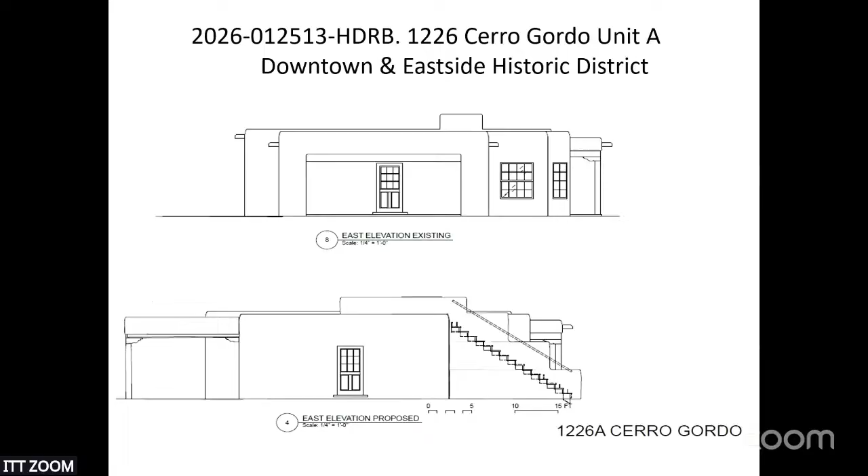It looks like maybe the existing condition violates that as well. Is that right, or am I looking at the drawings wrong? The west and the east? Yes. So I do believe that they met the 3-foot rule. I don't have dimensions on this particular window. I can say for the west for sure, it really does seem that it's 3 feet.

But I could not speak to the east, though I can allow the applicant to answer that. I do know that I don't believe any of the window dimensions are really going to change, just the window type. It appears that it's really close to the corner, but maybe I'm just seeing that differently. Thank you, and that may be existing on the new one.

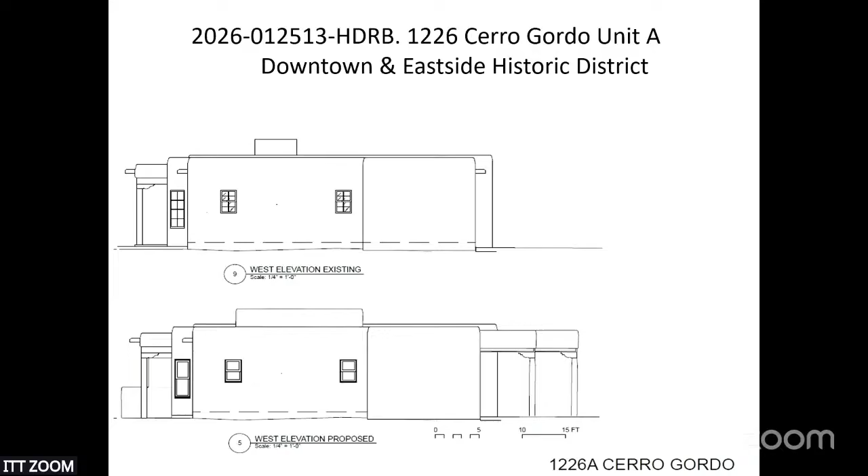Madam Chair, first, I'm going to miss Gary. Sorry, it caught me off guard. In reference to your question about how close we are to the...

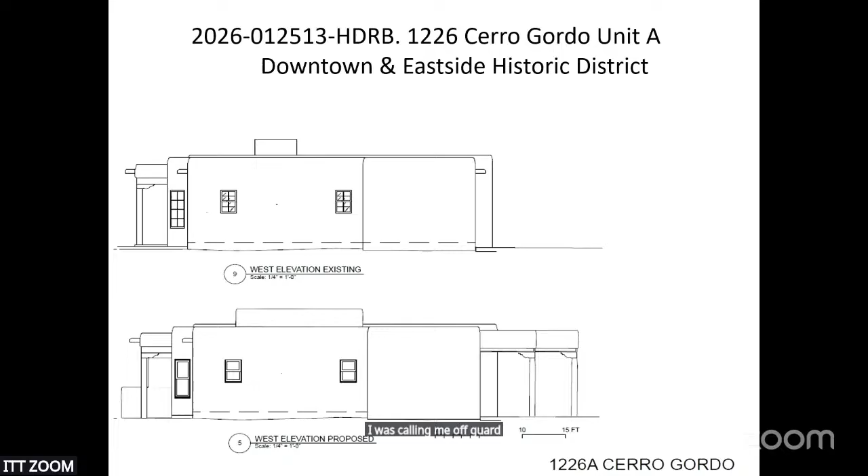It's in their packet. I think the floor plan will answer some of these questions, but the rear elevation of this building has sort of bay windows, and that's what's creating that line that looks like they're violating the rule, but that's how they're set up.

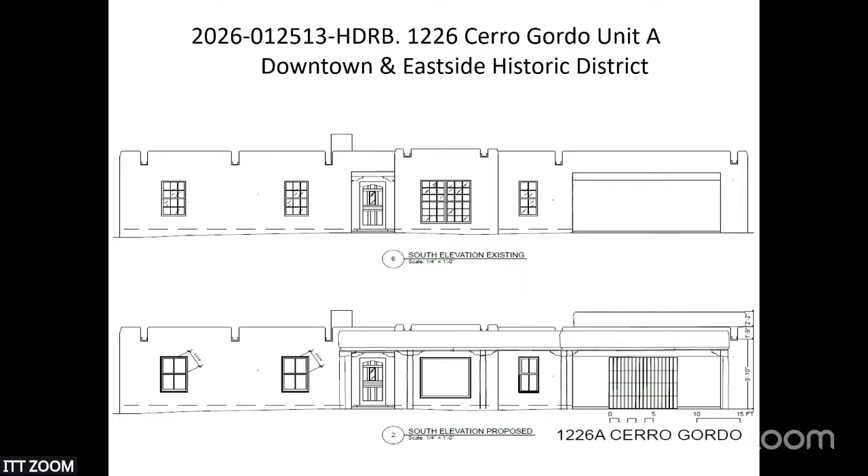I stand for other questions. Chris, did you have anything further to tell us? I don't. The owner doesn't, unless there are questions.

Oh yes, Member Cherry. Yeah, what are the windows going to be? They're wood clad aluminum. What, clad wood window? Okay, because in the presentation, Amanda was saying true divided light. So are they true divided light or simulated divided light?

The ones on the street facing elevation, we call them true divided lights, but it's on the outside, with a spacer bar on the inside. It's one piece of glass, so it's not what's there now, which has the divider in between the glass. Okay, so it's a simulated divided light, but it's the type that we typically approve. Yes, that's correct.

Do you have a brand selected yet, or just to get an idea? Yeah, we're looking at Pella. Okay, all right, thanks.

Any other questions, board members? Anyone in this room wanted to comment in reference to this particular project? No? And anyone online?

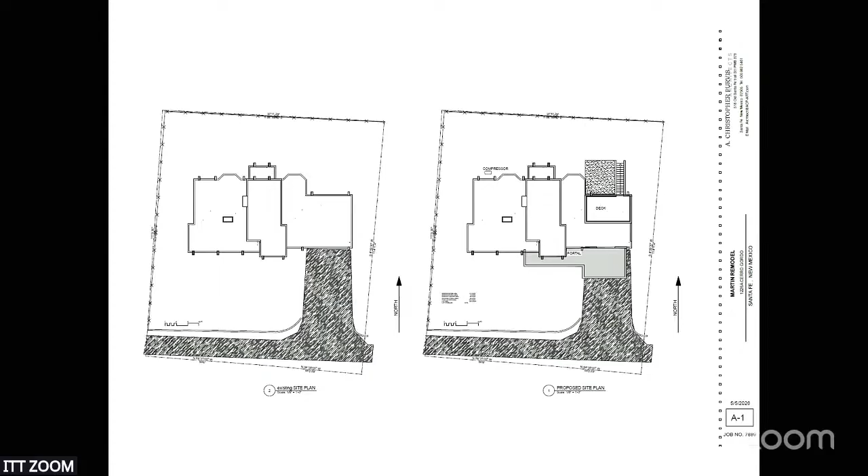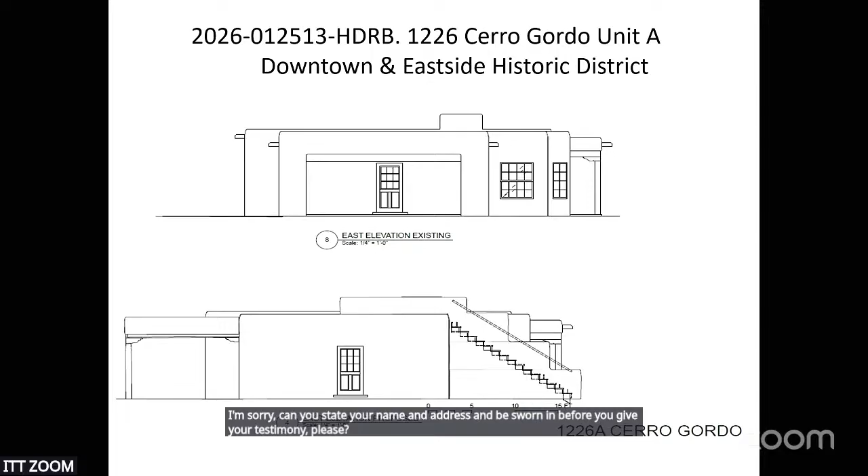Ms. Huddleston, there we go. You have bay windows? I'm sorry, can you state your name and address and be sworn in before you give your testimony, please? Anne Marie Huddleston, 164 East Houghton Street. Do you solemnly declare and affirm that the testimony you have in reference to this item shall be the truth and nothing but the truth, and do so under the penalties of perjury?

Yes. Please proceed. So you've got some bay windows on this house, is that correct? Yes, that is on the north elevation. And those are historically accurate to this type of look? Maybe the best answer to that question is this: we are not changing the floor plan. They're not actually completely bay windows. There are 3 windows put together on a hexagonal form that was part of the original building. We're just changing the glass in those windows.

Thank you. That's all. Did you have any further comments or questions? Not for me. And do we have anyone else? No, Chair Rios, I don't see any other hands raised. There are no further questions or comments from the board. I will entertain a motion at this point.

Yes. Member Cherry. So in case 2026-012513-HDRB at 1226 Cerro Gordo Unit A, Downtown Eastside Historic District, I would move to approve the application as submitted and note that the applicant has met all of the criteria for approval.

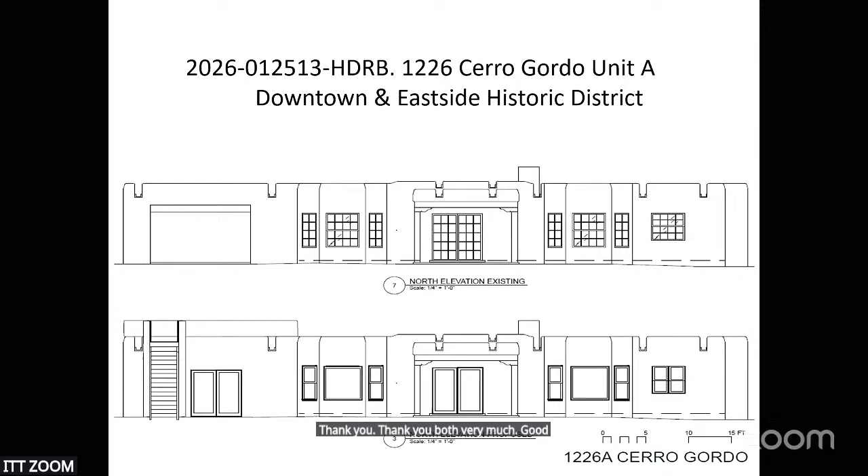Thank you both very much. Good luck on your project. Next case is located at 619 West Alameda, and is that applicant here.

Lanny, is the applicant here? We're checking online. Oh, I should tell you that if you disagree with the decision this board renders this evening, you do have the option to appeal to the city council. And you do need to get together with staff so that they can guide you through the process.

It looks like he's online. Lanny, you have the floor. This is case 2026-012285 HDRB. Yeah, you have to stay.

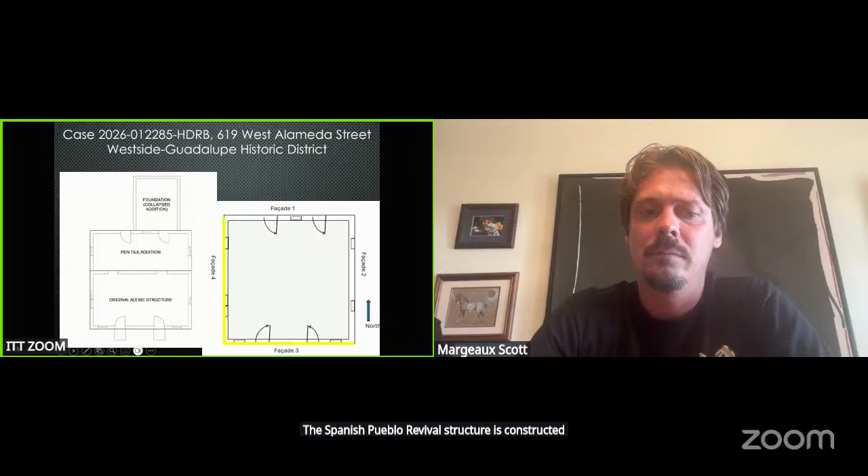Okay, for 619 West Alameda Street for a remodel and new construction. 619 West Alameda is on the north side of Alameda, across from the Santa Fe River Park. The 702 square foot single family residence is listed as contributing to the West Side Guadalupe Historic District. The Spanish Pueblo Revival structure is constructed of adobe and pentile. The adobe portion of the residence was constructed about 1943, with the pentile addition being... can't make this work.

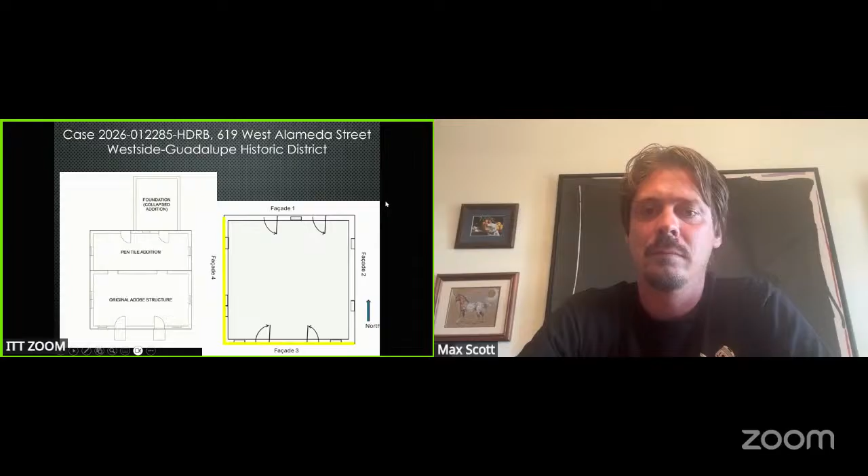Change slides on me. No, I'm trying to go down here. Sorry, I'm having technical difficulties. Where's my mouse? Lost my mouse, so I do apologize.

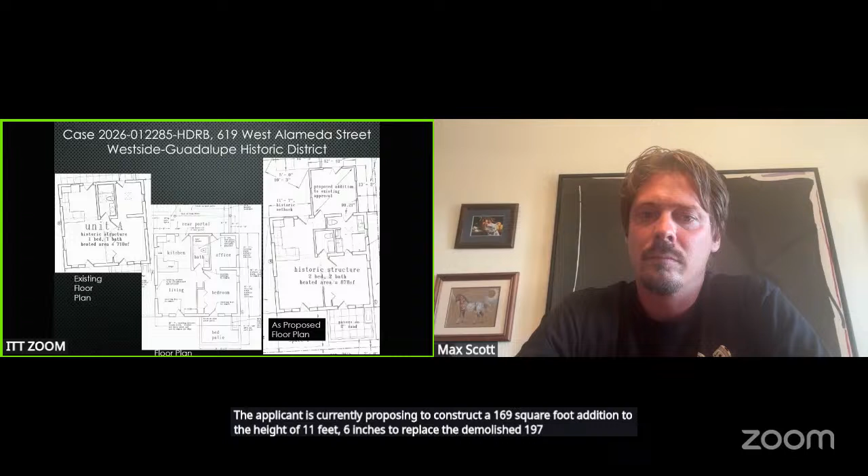Okay, so the property came before the Historic Districts Review Board back in March of 2026 with a proposal to install the bond beam, repair some historic windows, re-roof the residence, and construct some yard walls. I'm just gonna... I got this. The applicant is currently proposing to construct a 169 square foot addition to a height of 11 feet 6 inches to replace the demolished 1975 addition on the north elevation. There are no additional changes to the primary south facade, so they're still going to do the work that was already approved, but they would like that addition as well.

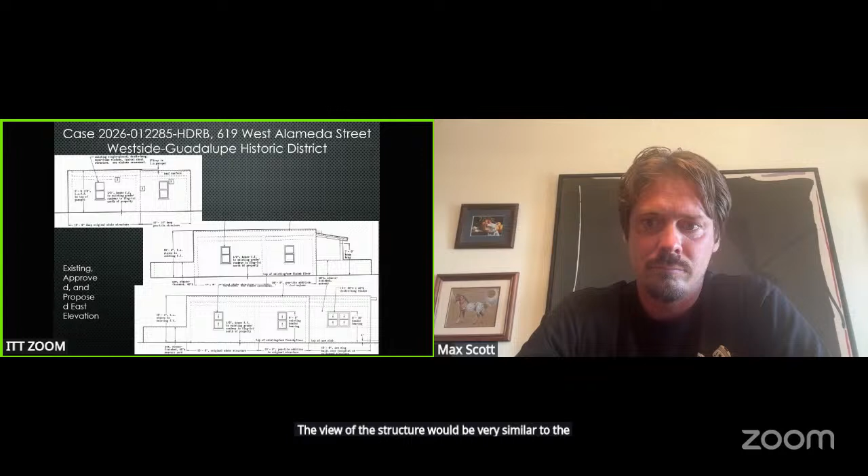That made sense. Okay, the addition is located where the 1975 addition was. It's visible on the east, west, and north elevations. The view of the structure will be very similar to the structure before the 2023 collapse of the rear addition, and is a minimum of 10 feet from our primary facades.

So there's no other changes on that building, but they are also proposing a new structure. The new structure is going to be a 745 square foot residential structure. It'll be to a height of 10 feet 6.5 inches, where the maximum is 14 feet 10 inches. The style will be a recent Santa Fe style.

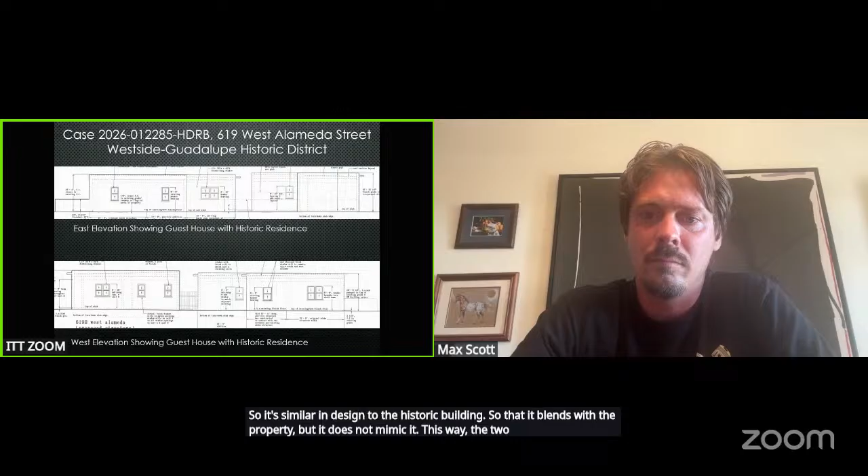So it's similar in design to the historic building so that it blends with the property, but it does not mimic it. This way, the two structures can be distinguished and each is a physical record of its time and place. On the property, the applicant is also planning to construct a 60-inch high interior coyote fence between the structures and some hardscaping.

The staff is recommending approval of the project and finds that the application complies with 14-4.6E for general design standards for all historic districts and 14-4.6G5 for the West Side Guadalupe Historic District.

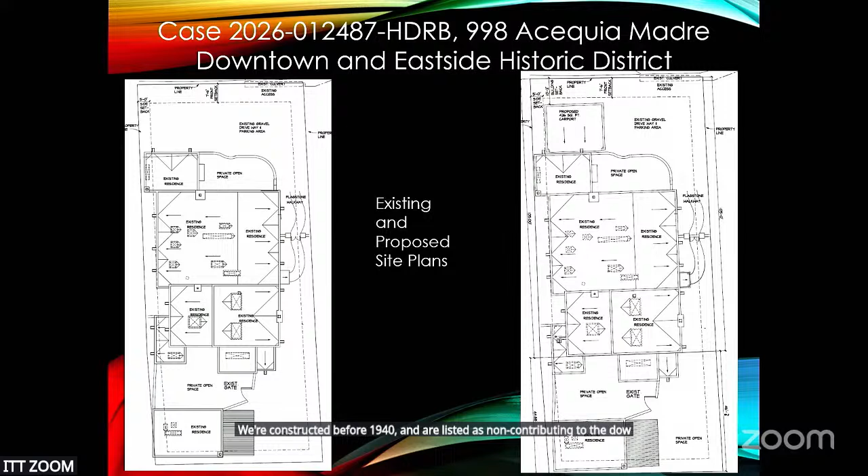Okay, so this is case 2026-012-487 HDRB for 998 Acequia Madre for a freestanding carport. The property at 998 Acequia Madre is located on the south side of the road at the Canyon Road Acequia Madre Y intersection. The Spanish Pueblo Revival style residence and guest house were constructed before 1940 and are listed as non-contributing to the downtown and east side historic district due to the number of alterations on the property. The applicant is proposing to construct a 426 square foot freestanding carport to a height of 9 feet 7 inches.

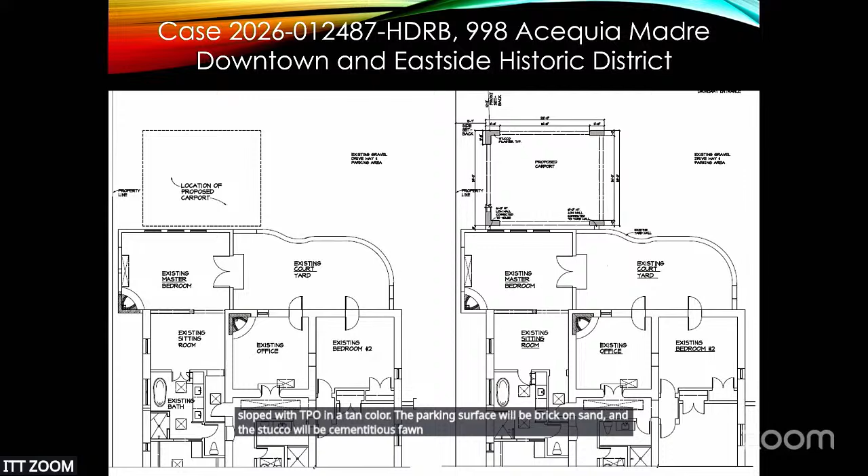The carport will be constructed of stuccoed masonry columns, exposed wood beams and corbels, and a stuccoed parapet. The roof will be sloped with TPO in a tan color. The parking surface will be brick on sand, and the stucco will be cementitious fawn to match the residence. The carport is open on all sides and will be entered from the west. Staff recommends approval of the proposed project and finds that the application complies with section 14-4.6E for general design standards and 14-4.6 G2 for the downtown and east side design standards.

Thank you, Lanny. Any questions for Lanny? No questions. Applicant, if you'll come forward, please.

Hi, please raise your right hand and state your name and address for the record. Mark Brown, 998 Acequia Madre. Mark, do you solemnly declare and affirm the testimony you have in reference to this item is the truth, the whole truth, and do this under the penalties of perjury? I do. Thank you, he has been sworn.

Good evening, Mr. Brown. Did you have anything further to add? No. And board members, do you have any questions for Mr. Brown? They don't. Does anyone in this room want to speak about this project? Nobody. Is there anyone online? Thank you, Chair Rios, I do not see any hands raised for this public comment. Okay, thank you. Board members, I will entertain a motion.

Member Benvenu. Case 2026-012-487, HDRB at 998 Acequia Madre. I move to approve the application as submitted.

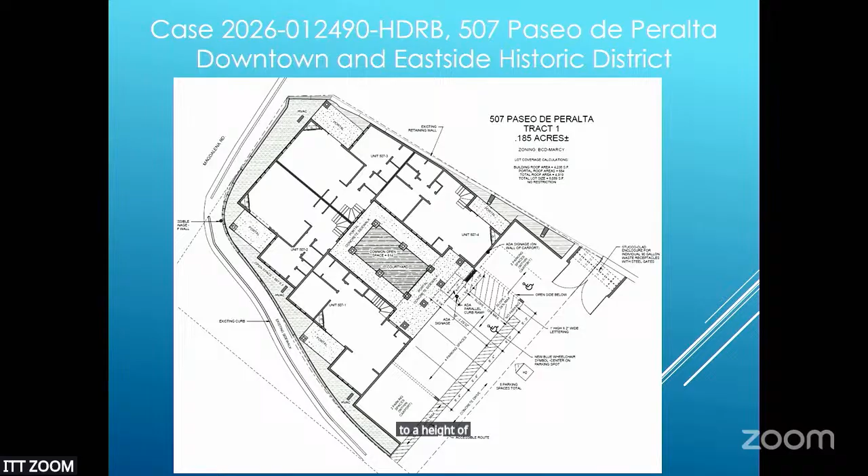So on the 507 Paseo de Peralta site, the applicant is proposing to construct a 4,235 square foot multifamily residence to a height of 24 feet, where the maximum allowable height is 25 feet on the vacant lot. All buildings are of Pueblo Revival design with earth tone stucco finishes, designed with flat roofs and parapets. Each building uses a variety of setbacks and offsets to break up the massing.

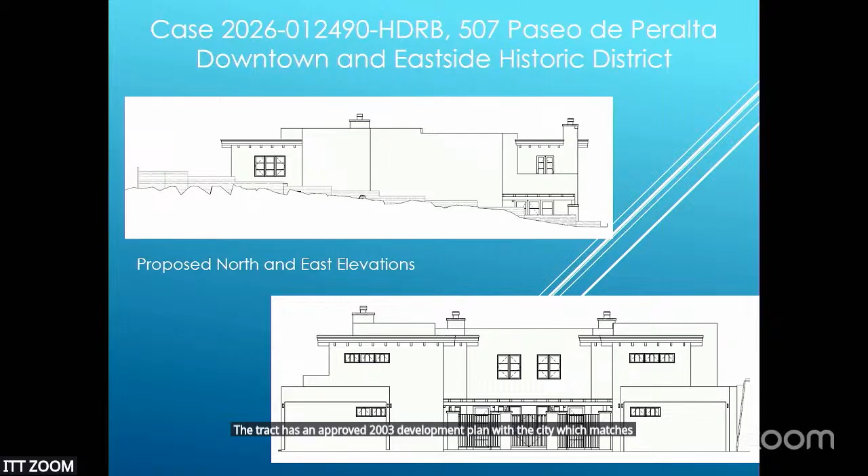Proposed project includes 4 condominiums in a 2-story building. The tract is zoned BCD Marcy, which allows for greater lot coverage than residentially zoned lots. The tract has an approved 2003 development plan with the city, which matches this request. Detail finishes include stone caps on chimneys, metal fascia, columns, roofing, and railing. Windows are wood clad. Yard walls are to a height of 4 feet, which is the maximum in this BCD district.

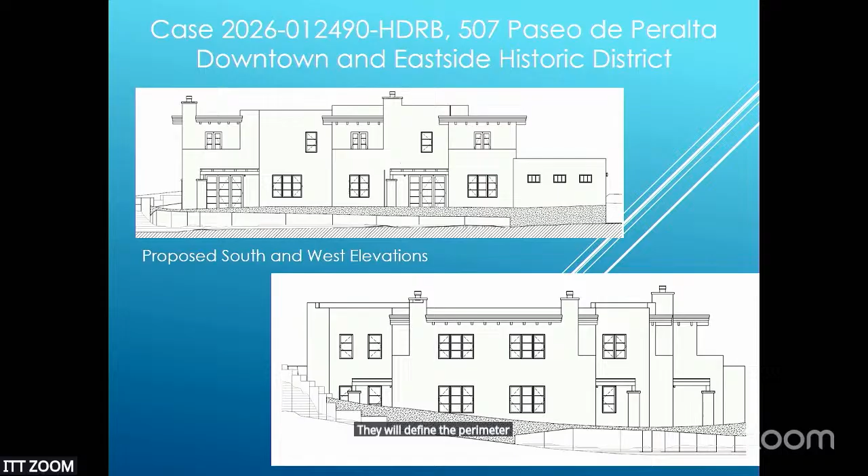They will define the perimeter of the tract. The existing historic stone wall will remain with no modifications. At the property at 511 Paseo de Peralta, the applicant is proposing to construct a 6,212 square foot multifamily residence to a height of 27 feet 6 inches, where the maximum allowable height is 23 feet.

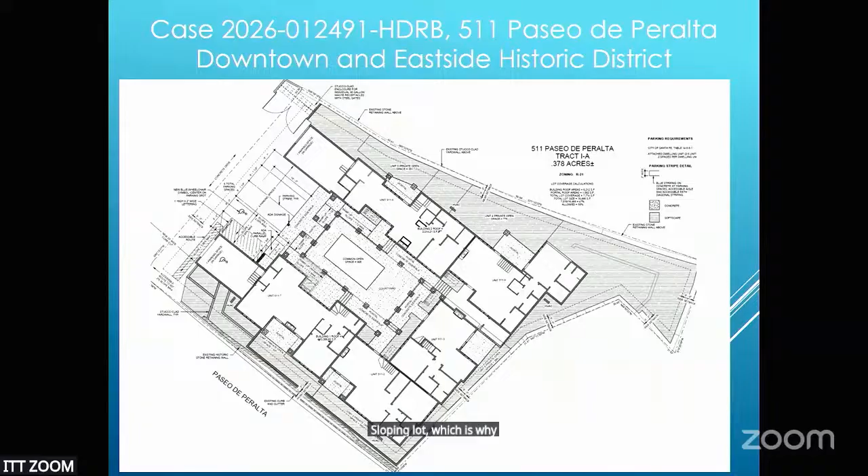It is on a sloping lot, which is why they're asking for the extra height. All buildings are of Pueblo Revival design with earth-toned stucco finishes, designed with flat roofs and parapets. Each building uses a variety of setbacks and offsets to break up the massing. The proposed project includes 5 condominiums in a 2-story building.

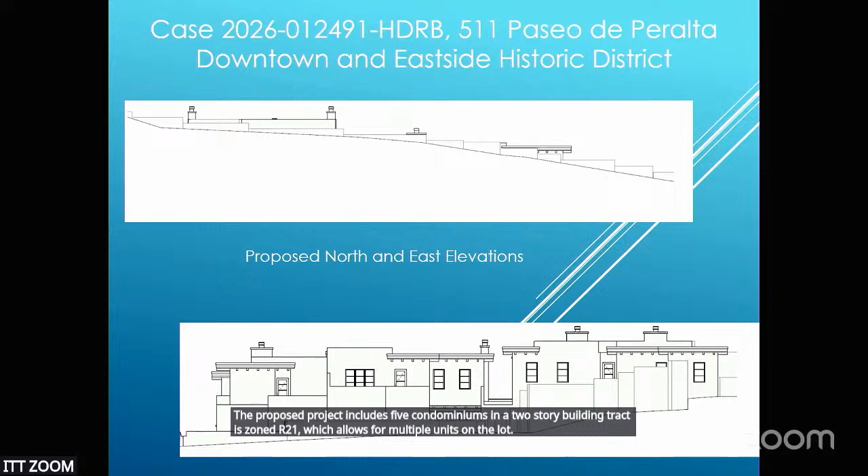Tract is zoned R21, which allows for multiple units on the lot. The tract has an approved 2023 development plan with the city, which matches this request. Detail finishes include stone caps on chimneys and metal fascia, columns, roofing, and railing. Windows are wood clad, yard walls to a height of 6 feet, will define the private open spaces behind the existing historic stone wall. The existing historic stone wall will remain with no modifications.

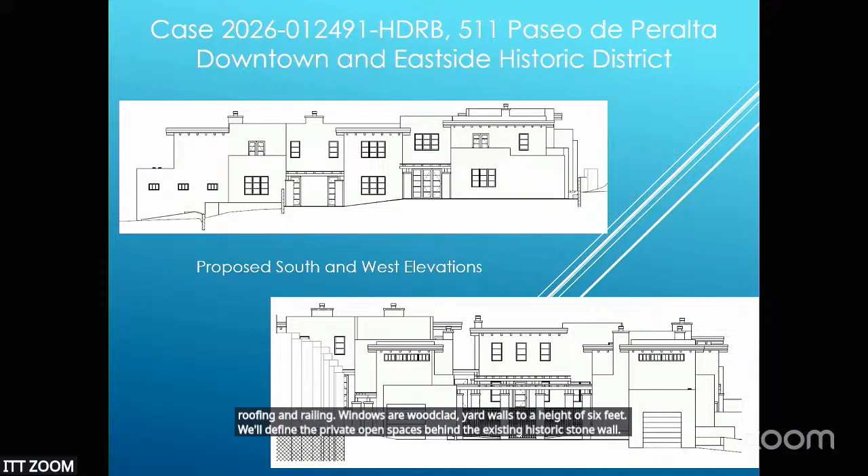These projects work in unison. The overall project with both addresses roofed area will be 12,693 square feet with a gross floor area of 13,790. The full project will have a single driveway entrance to the shared parking lot.

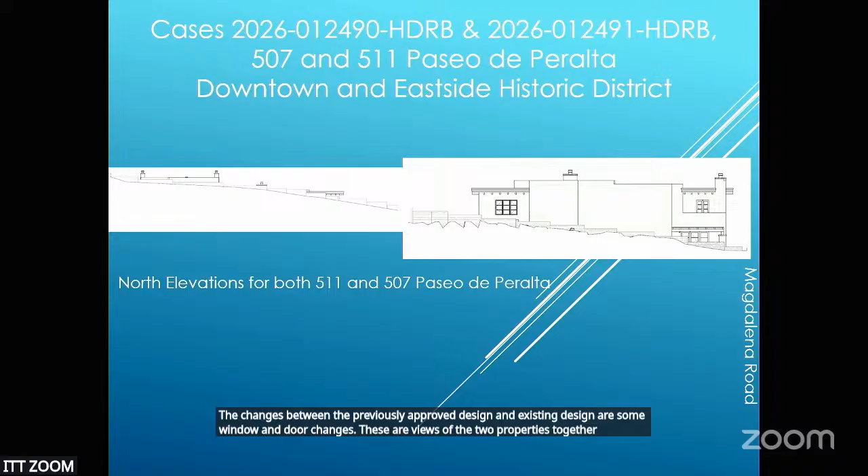The changes between the previously approved design and existing design are some window and door changes. These are views of the 2 properties together in order to get a better perspective of the overall project. It's a little small.

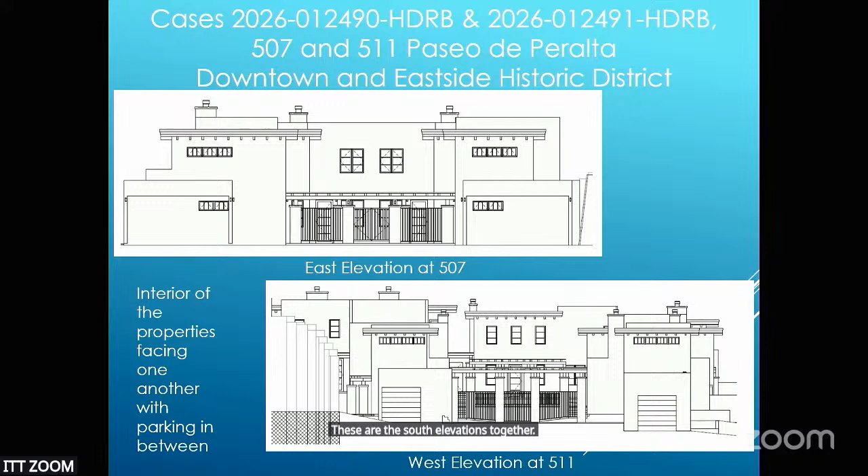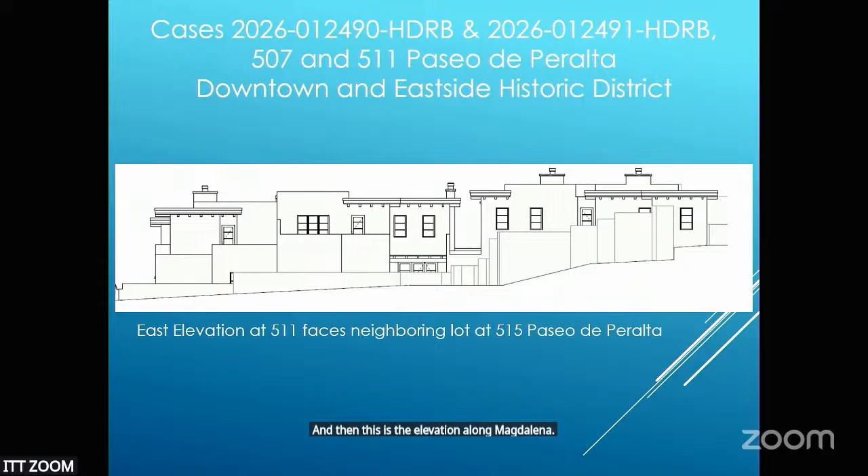These are the south elevations together. And these are the elevations that are facing the project parking area. And then this is the elevation along Magdalena. This is the elevation facing the neighbors at 515 Paseo de Peralta.

I do want to point out that at our site visit today, they did have up their story poles, but the story poles were tied to the fences, so they did not actually indicate actual setbacks for the property. There is a 5-foot setback on the side that separates 511 Paseo de Peralta from 515 Paseo de Peralta. That was a concern of one of our neighbors.

Staff is recommending approval of the proposed projects for both cases, 2026-012490 for the 507 Paseo de Peralta and 2026-012491 for 511 Paseo de Peralta, and finds that the applications comply with section 14-4.6 general design standards for all historic districts and 14-4.6 G2 for the downtown and east side design standards. Stand for questions. Thank you, Lanny.

Lanny, would you reiterate the number of buildings for each project? Correct. So the 507 Paseo de Peralta will have 4 townhomes, in the equivalent of 2 buildings. And then the one on 511 is 5 townhomes. Sorry, let me correct that: the 507 is 4 townhomes in a single building, and the 511 is 2 buildings with a total of 5 townhomes. So the full project is 3 buildings with 9 townhomes.

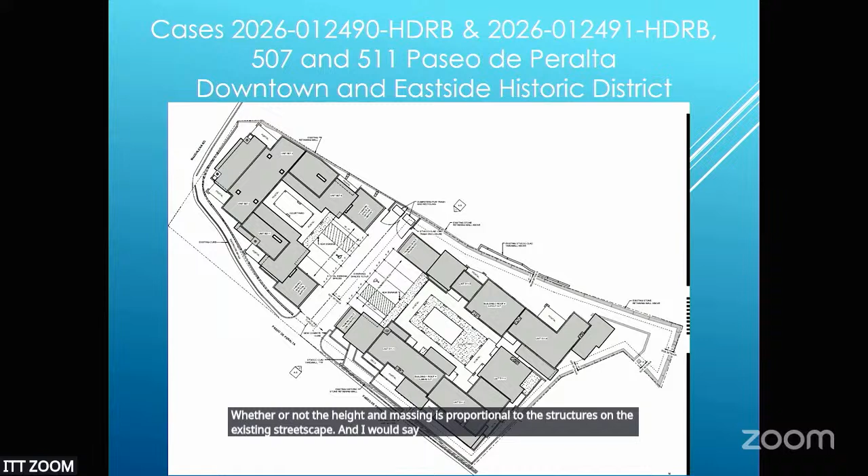And in addition, even when there is a height calculation, the ordinance instructs the board to take into account whether the height and massing is proportional to the structures on the existing streetscape. And I would say pretty clearly that what we've seen so far is out of proportion, especially the extremely tall frontage fronting almost directly onto the sidewalk on Paseo de Peralta, which I think is highly problematic. We're also instructed to consider, if not mandate, step backs in situations where there's a potential proportion problem with the existing streetscape and the requested height.

So I think that at a bare minimum this project should probably be stepped back one story on the streetscape and possibly two stories on the north side. So that's just my preliminary thoughts right now, but hopefully some of that will be clarified by the applicant.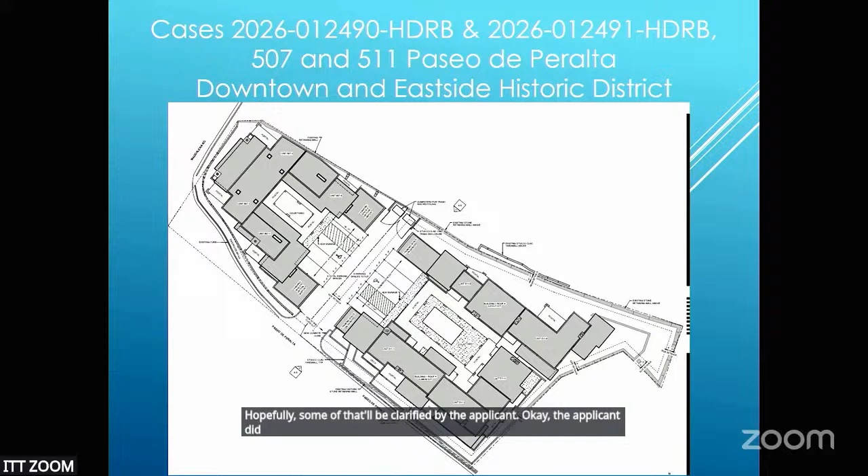Okay, the applicant did give us a model, and I would like to show that to you. It is a digital model, so it's not in paper or whatever. But let me give you her digital version here, so you can kind of get an idea. The video moves a little bit fast, so if you need me to pause, just let me know.

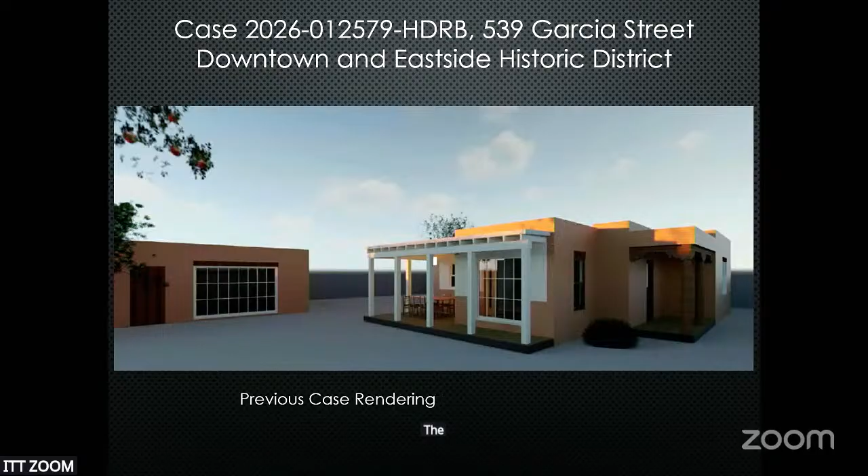My applicant is here. This is case 2026-012579 HDRB for 539 Garcia Street. The property sits about 115 feet east of Garcia Street behind another residence on a narrow dirt private road. The Historic Districts Review Board approved the construction of an addition to the height of 10'6" and a 206 square foot portal and window and door replacement on the main residency, and the conversion of the garage to a casita by installing new windows and stuccoing and re-roofing.

In a previous case, that was on May 12th, they postponed the garage door replacement with a request for a redesign. This request addresses that redesign of the garage opening.

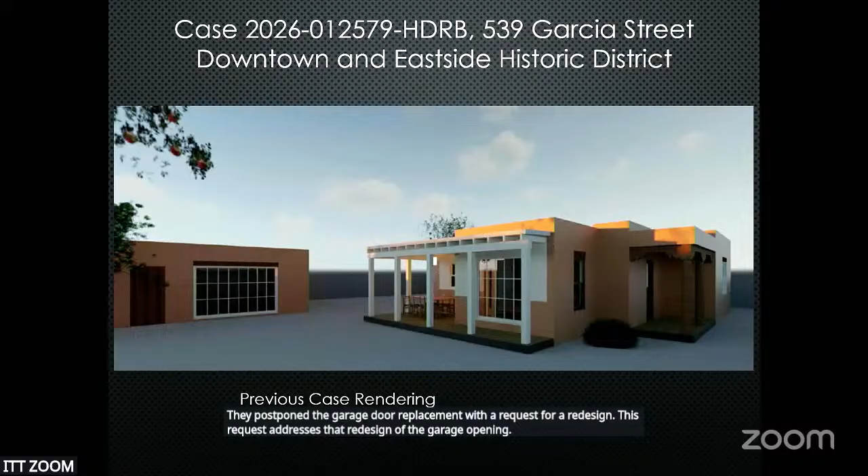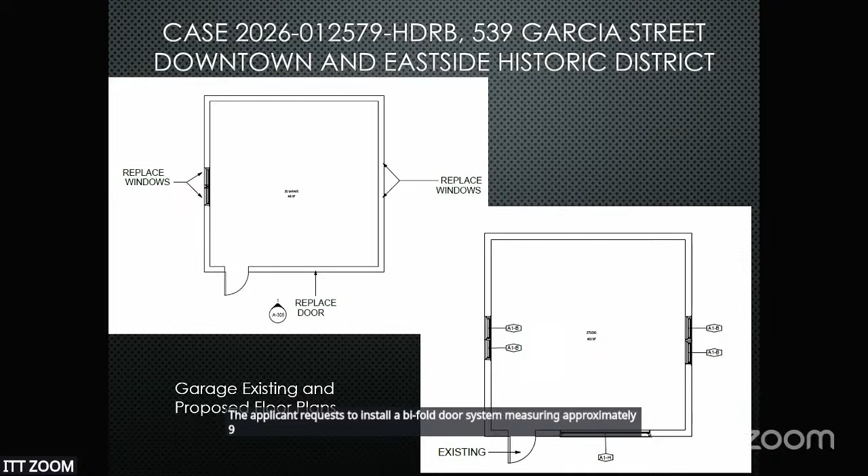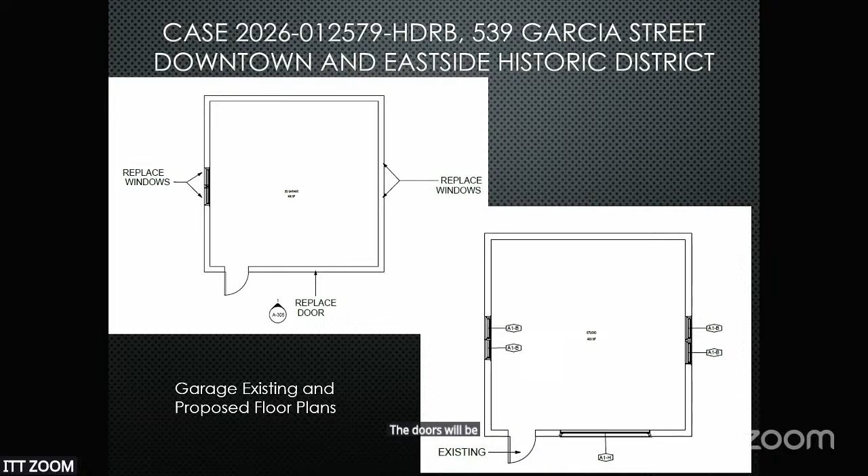The Adobe one-car garage is Pueblo Revival style, consistent with the house style, and dates to the 1940s. It is listed as contributing to the downtown and east side historic district, with the south elevation as the primary facade, excluding the non-historic garage door. The applicant requests to install a bifold door system measuring approximately 9'4" by 7 feet high, maintaining the original proportions and visual scale of the garage opening. The doors are designed to fold completely open, allowing the opening to function as a flexible studio entrance while preserving the original garage opening. The doors will be recessed and stained in a wood finish. The applicant is not altering the dimensions of the garage door, as requested by the board in their May 12th hearing.

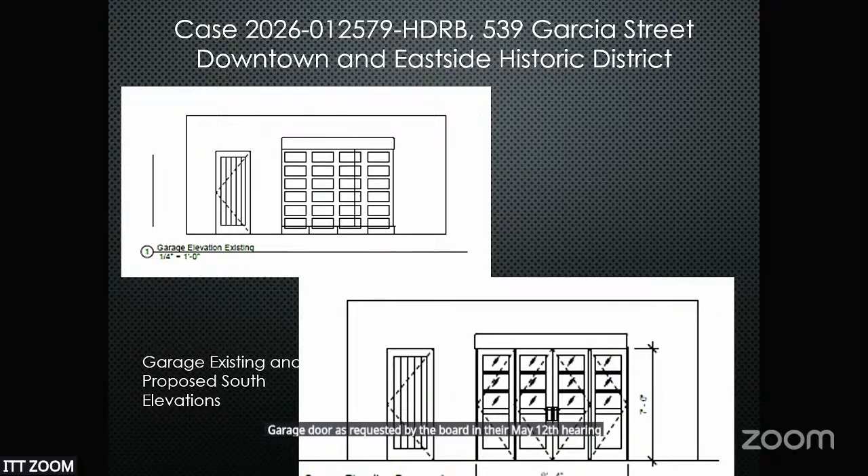Staff also finds that the new design speaks to the garage opening, and this is a sample of the doors that would be located in the garage door opening. Staff recommends approval of the proposed project and finds that the application complies with 14-4.6E general design standards and 14-4.6G2 for the downtown and east side design standards. Stand for questions. Any questions for Lanny?

No questions. Applicant, would you come forward please? Raise your right hand. Do you solemnly swear and affirm that the testimony you give in reference to this item is the truth, the whole truth, under penalty of perjury? I do. Please state your name and address for the record. Yvonne Geisler, 804 Camino Acoma, 87505. Thank you.

Thanks for letting us bring this back. I think my client's happy with where we landed on this. I hope the board is happy. Madam Chair, any comments or questions from the board? I think you did a really good job. I agree, thanks for the work you put into it. Any other questions?

Anyone in this room wanting to comment on this project? No one. Anyone online? Yes, Chair Rios, we have Ms. Beninato.

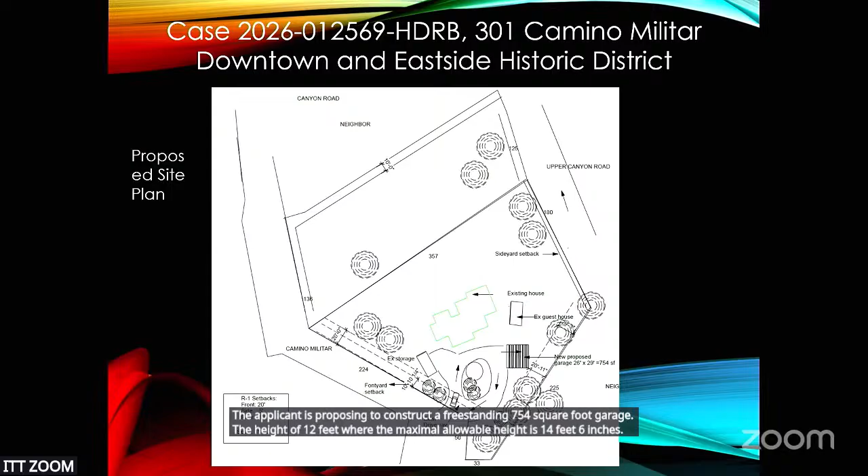The applicant is proposing to construct a freestanding 754 square foot garage to a height of 12 feet, where the maximum allowable height is 14 feet 6 inches. The garage is designed in a simple Spanish Pueblo design. There will be 2 10-foot wide by 9-foot tall automatic doors on the west elevation, currently planned as metal roll-ups in style. A solid wood pedestrian door will be on the north elevation. Windows will include 3 on the east and 2 on the south elevation, all wood clad, single light, and not publicly visible.

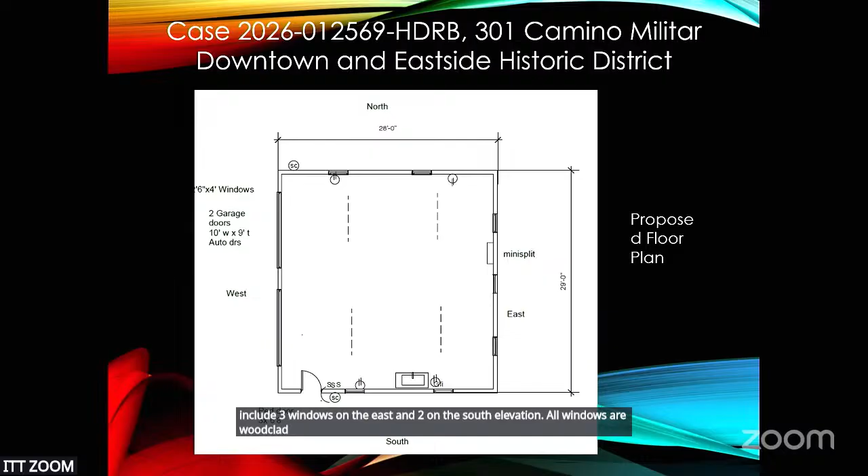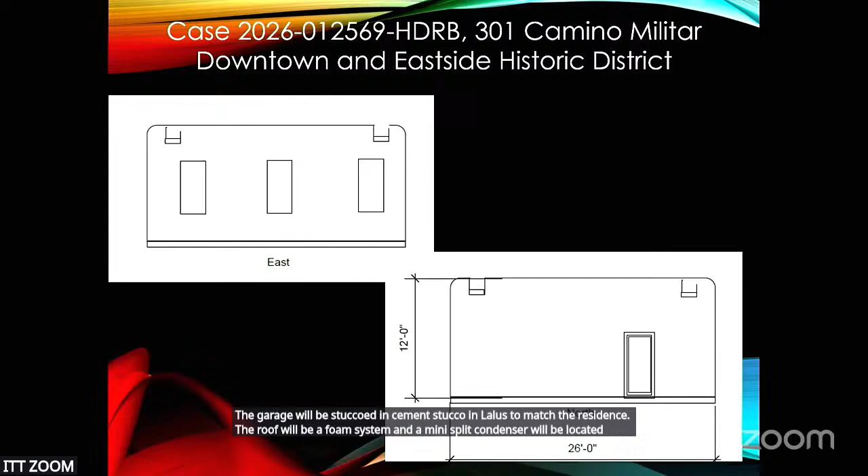The garage will be stuccoed in cement stucco in La Luz to match the residence. The roof will be a foam system, and a mini split condenser will be located on the east elevation on the ground and will not be publicly visible. Staff recommends approval of the proposed project and finds that the application complies with section 14-4.6E general design standards and 14-4.6 G2 for downtown and east side design standards. Stand for questions.

Hi, please state your name and address for the record. Michael Salambini, 125 Lincoln Avenue, Santa Fe, New Mexico, 87501. Thank you, Michael. Do you solemnly declare and affirm that the testimony you have in reference to this item is the truth, the whole truth, and do this under the penalties of perjury? Yes. Thank you, he has been sworn, Chair.

Anything further to add? Pardon me? You have anything further to add to what?

Just briefly, I wanted to say good evening, Chair Rios and members of the Historic District Review Board. The proposed project at 301 Camino Militar is a modest 754 square foot detached garage designed to be compatible with the existing Spanish Pueblo Revival architecture, as Lanny had mentioned, found both on the property and throughout the entire neighborhood. The garage remains below the allowable height, utilizes traditional Santa Fe materials and finishes, and has been sited and designed to preserve the historic character of the property and surrounding streetscape. Staff has found the project consistent with all applicable historic district standards and has recommended approval. We thank you again for your consideration and respectfully request approval of the application as submitted. I stand for any questions.

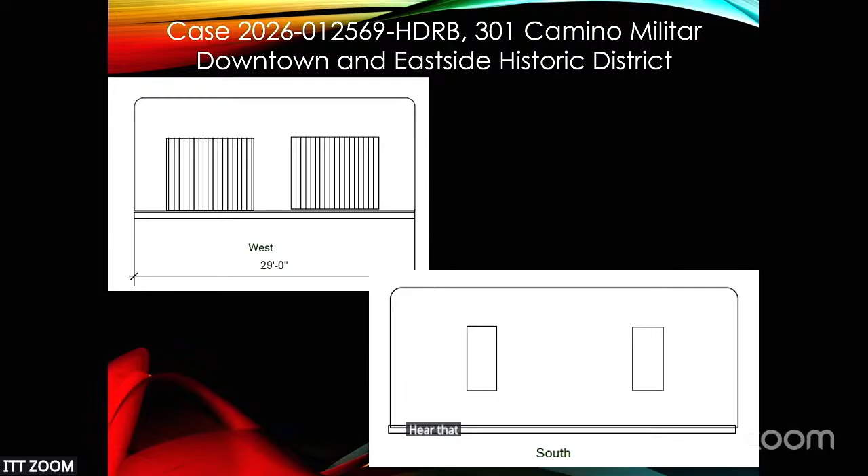Next case is located at 426 Delgado Lane. Planning. Okay, sorry about that.

This is case 2026-012-578 HDRB for 426 Delgado Lane for a remodel. 426 Delgado Lane is located on the west side at the end of the road. The single-family residence is known as the Russell House and was constructed of adobe in late 1928, likely by Rose Parker Curtis. The residence is listed as contributing to the downtown and east side historic district, and the east is designated as the primary facade. The guest house is listed as non-contributing due to its age. The tool shed is designated as contributing with the east as the primary facade, and the east yard wall is designated as contributing.

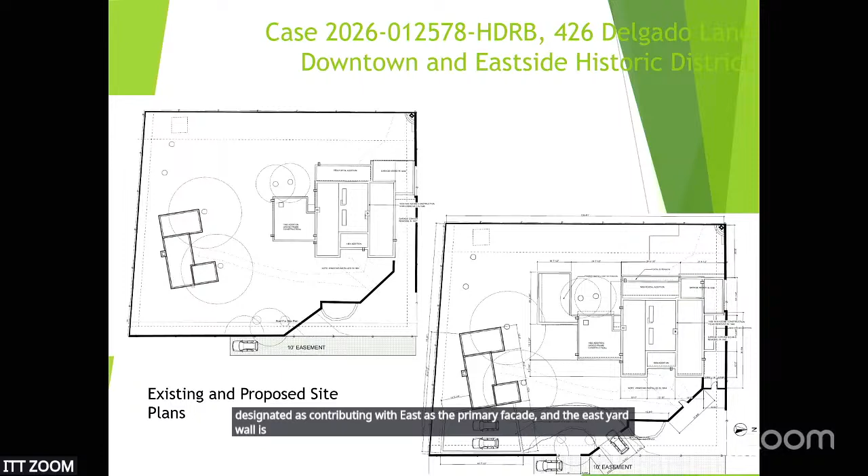The applicant is proposing the following remodel on the main house. They want to construct a total of 570 square feet of additions on the main residence, including a 93 square foot addition on the north side to extend the kitchen. That's located here in the red, if that helps you. The addition is to the adobe structure and will be constructed of new 10-inch adobe walls with 2-inch polystyrene and plaster on both sides of the new wall. This addition will not have undulating parapets to differentiate it from the historic residence.

They will also be constructing a 392 square foot addition on the south side of the residence to create a closet and bathroom. This is the green circle on the drawing. This addition is the framed portion of the residence and will be of frame construction, and will not have undulating parapets to differentiate it from the historic residence. The windows will be the same style as the proposed replacement windows for the rest of the residence.

They will also be constructing a 12 square foot addition to the mechanical room on the west elevation, creating a single line at the 1990s addition. This is the small blue circle. And then they want to extend the existing 230 square foot portal by an additional 85 square feet for a total of 315 square feet on the west elevation. This is the yellow circle.

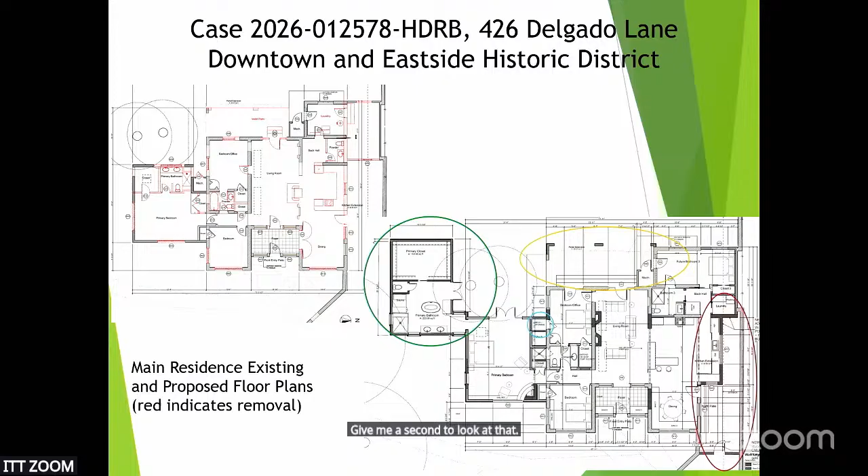Give me a second to look at that. The applicant is also proposing to raise the roof of the garage enclosure on the northwest corner by about 2 feet and undulate the new parapets to blend it with the main portion of the residence and create a bedroom.

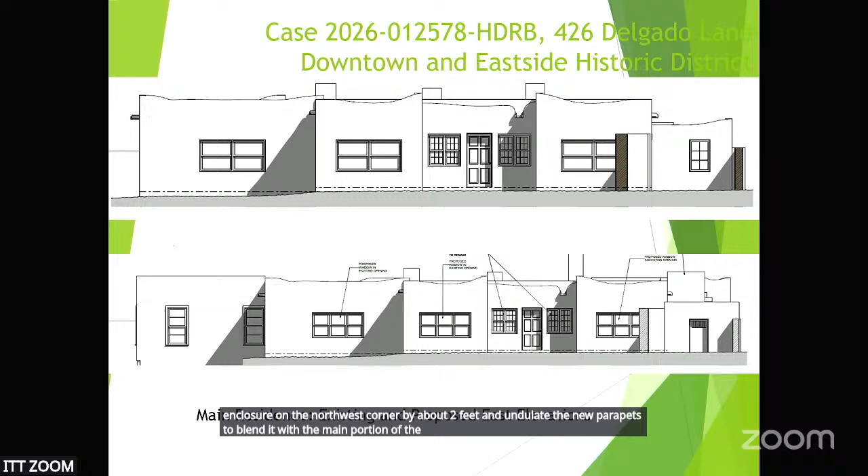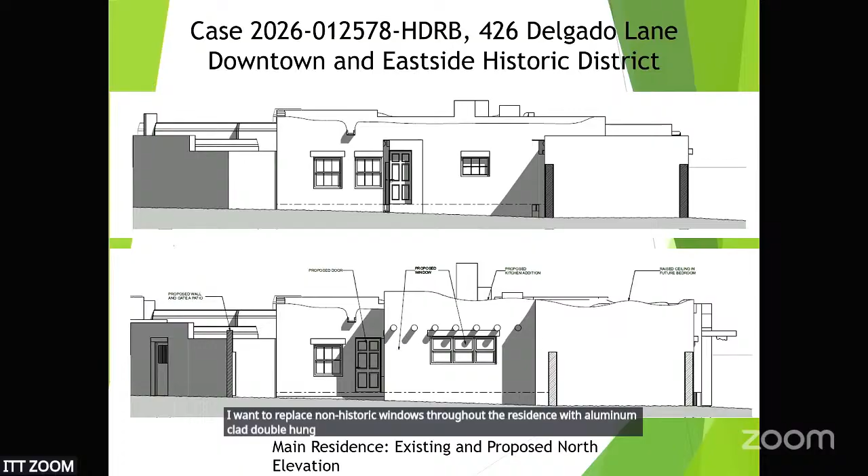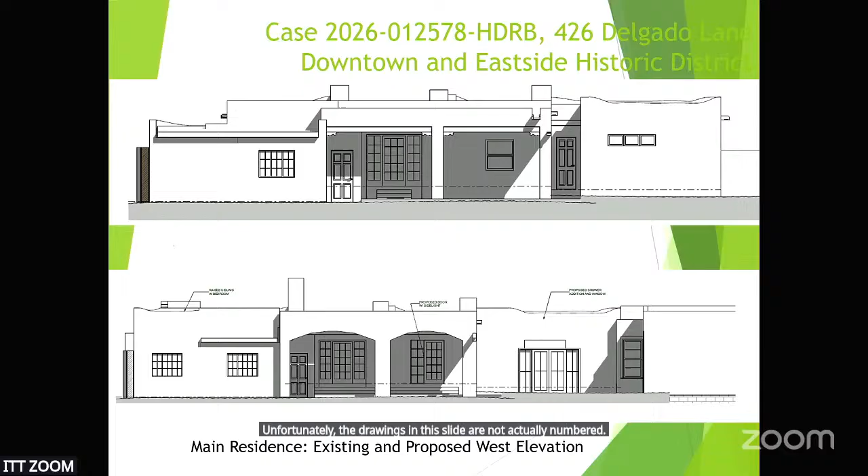They want to replace non-historic windows throughout the residence with aluminum clad double hung windows in a Mediterranean color, and repair the historic windows in the residence, which includes windows 1 on the south of the east entry door, and 9 on the northwest, 13 on the north elevation, and 15 on the north of the east entry door. Unfortunately, the drawings in this slide are not actually numbered, but it includes all the windows on the eastern side. They also want to stucco in cementitious in a buckskin color.

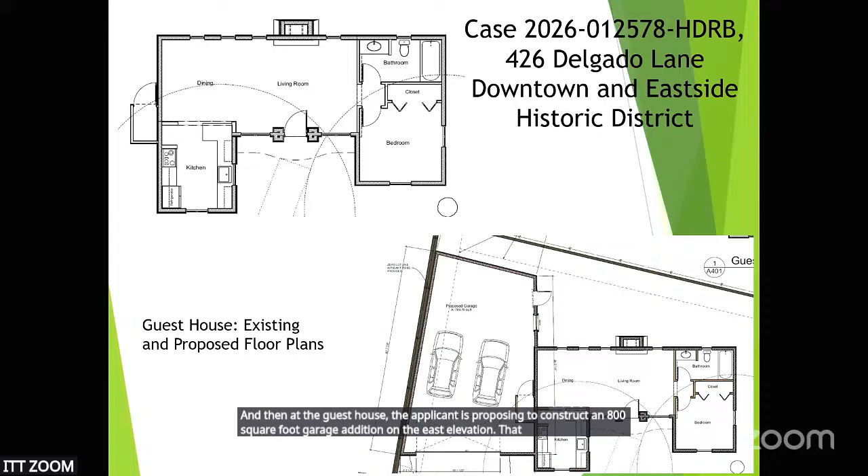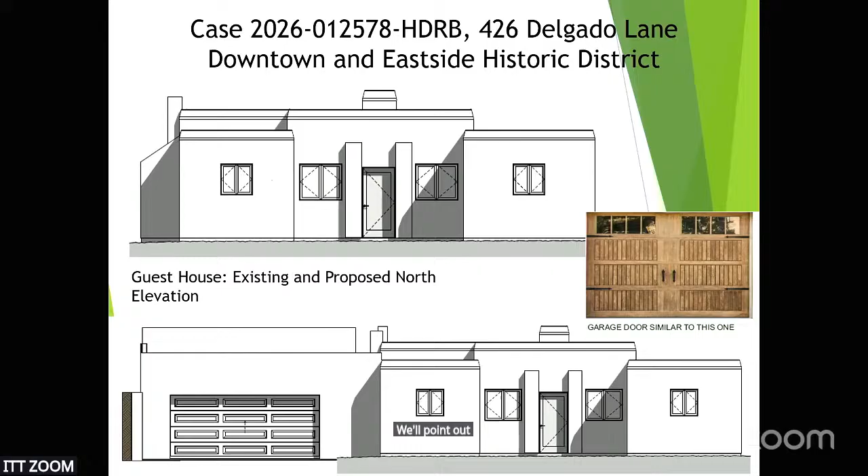At the guest house, the applicant is proposing to construct an 800 square foot garage addition on the east elevation, a 2-car garage. The guest house is on the 0 lot line, and the new garage will be at the 0 lot line. The neighbor has provided an affidavit allowing the lack of setback as required. The garage door will be on the north and will be a wood carriage style, we'll point out that was listed incorrectly in my staff report. Due to the 0 lot line on the east, there are no fenestrations on the east elevation.

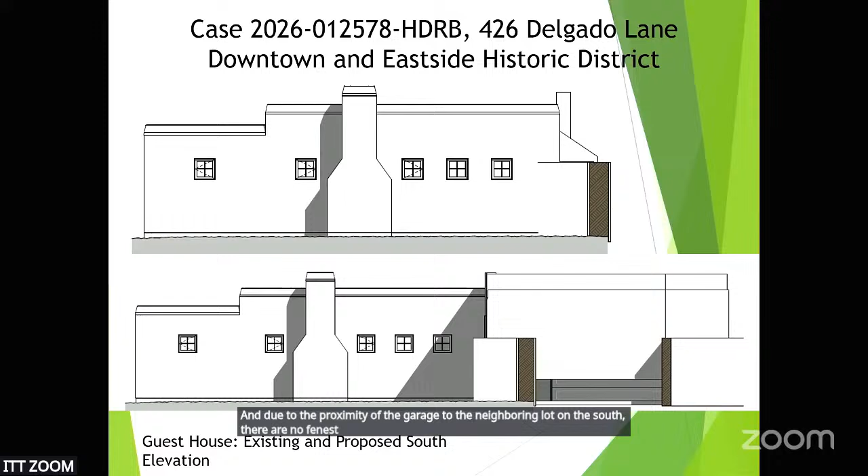Due to the proximity of the garage to the neighboring lot on the south, there are no fenestrations on the south elevation. The west elevation will have a pedestrian door and window. The entire garage will be stuccoed in cementitious buckskin to match the house.

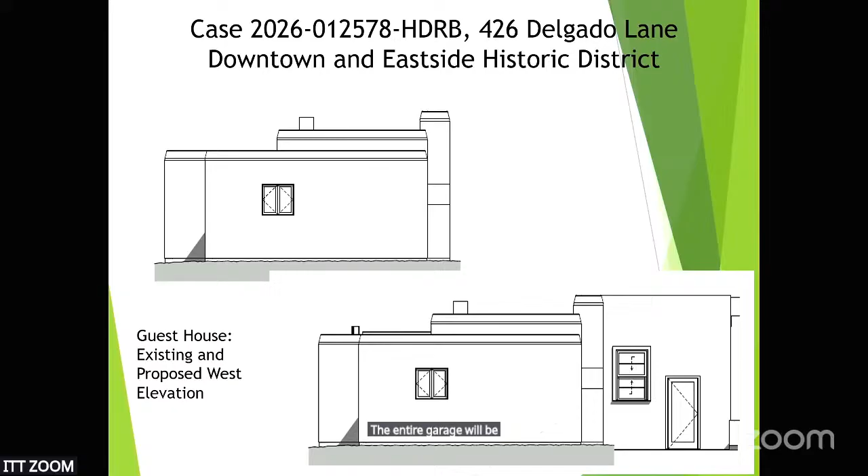On the property, the applicant is also proposing to create an opening in the contributing east yard wall in order to create a driveway access to the new garage structure. An exception is requested to section 14-4.6E42 to remove a section of the contributing wall.

They would also like to install a vehicle gate in the new opening of the east yard wall, and the gate would be of metal frame with wood. They will also install a wall with pedestrian gate at the north end of the residence, between the end of the east yard wall and the north yard wall. The pedestrian gate will mimic the existing gates in the east yard.

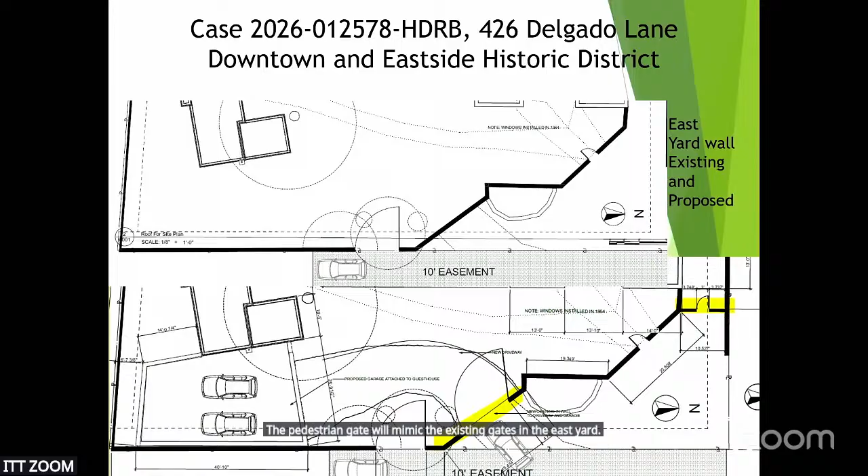When looking at the existing yard wall, the location of the proposed opening is where the southern non-historic planter currently sits. The more northern and larger of the two planters will remain.

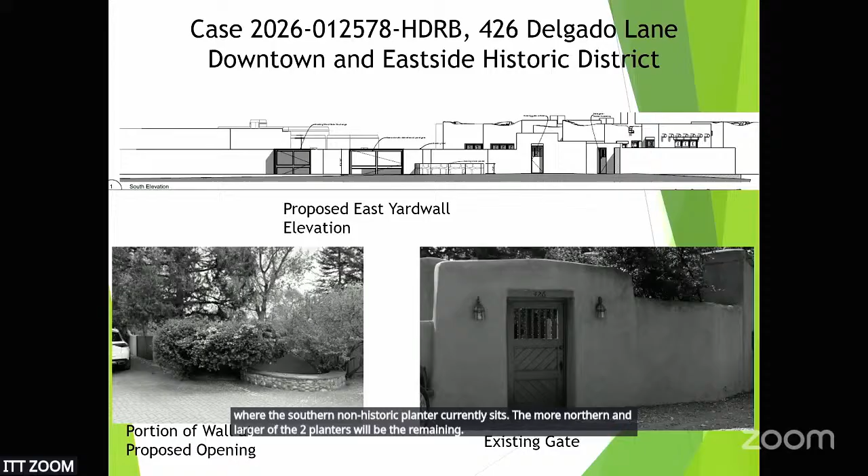Staff finds that the exception criteria have been met and recommends approval of the exception to 14-4.6E42 to remove a section of a contributing yard wall. Otherwise, staff recommends approval of the other elements of the application as they comply with 14-5.2D general design standards and 14-4.6G2 for the downtown and east side historic district standards.

Thank you, Lanny. How much of the contributing wall will be removed? How many feet? Thirteen feet. Say that again. Thirteen feet. That'll be a total of thirteen feet in the different locations. Just in the one location. There's already a fence, a gate at this other location.

Any other questions at this point? Board members? Thank you, Madam Chair. Lanny, did you say that the guest house garage addition is 800 square feet? Yes. And is the guest house itself 744 square feet? Yes. So do we have an issue with the 50% rule? It's a non-historic building. Oh, sorry. Thank you. Okay, thanks.

Any other questions? Applicant or applicants, please come forward.

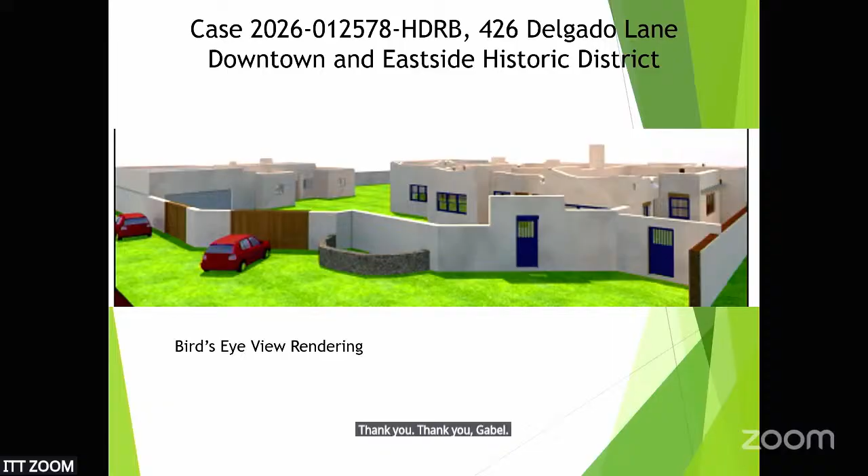Thank you, Gayla. The last case on this agenda is located at 1295 Cerro Gordo. Is that applicant here? Yes, they are.

I'm sorry, is Harvey Monroe online by chance? I don't see a Harvey Monroe online. Madam Chair, I'm going to recuse myself from this case because I've worked on the project. Let the record show Member Cherry is recusing himself. Was Harvey online? So the applicant is actually Harvey Monroe. The homeowner is here, but she's not comfortable presenting the case. So do you want to go ahead and postpone for now?

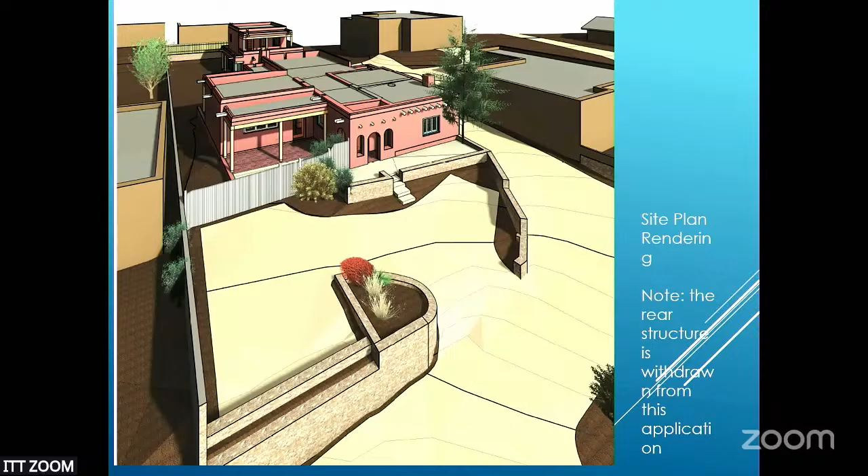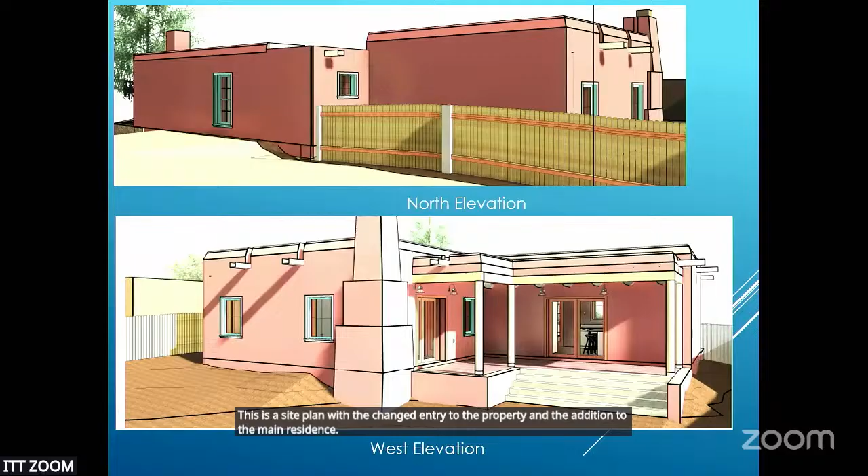Sorry about that. The applicant did provide these renderings. This is the site plan with the changed entry to the property and the addition to the main residence. These renderings are the north and west elevations as proposed.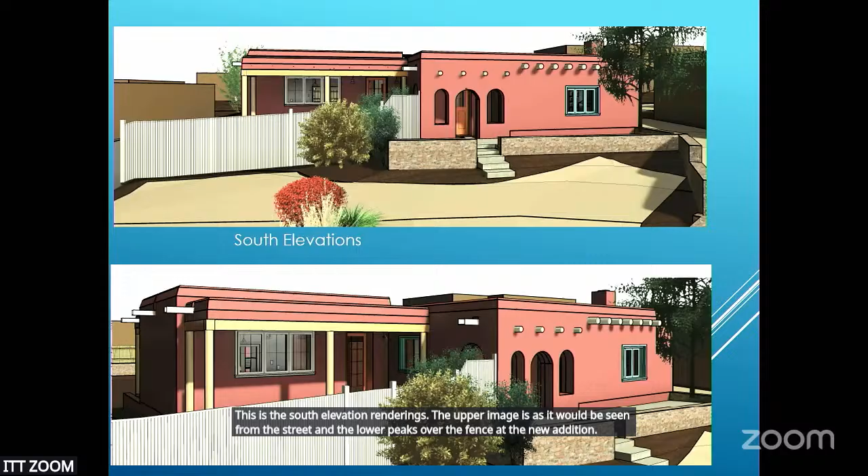The exception criteria for section 14-4.6F2 to exceed the maximum allowable height is part of the application for the garage, which has been withdrawn.

Staff finds that the exception criteria for section 14-4.6E22C to exceed 50% of the historic footprint has not been met and recommends denial of the additions to the main residence.

Staff finds that the exception criteria for section 14-4.6E42 to remove historic material from the front yard wall have been met and recommends approval of the alteration to the contributing retaining wall. Staff recommends approval of the other elements of the application as they comply with 14-4.6C general design standards for all historic districts and 14-4.6G2 for the downtown East Side Historic District.

I stand for questions. Any questions for Lanny at this point?

So Lanny, you indicated that all the exception criteria have been met? Not for the addition to the house. We're saying those have not been met, and we're recommending denial of the additions, basically due to the size of those additions. As for the exception to the removal of historic material from the retaining wall, we're saying that was met.

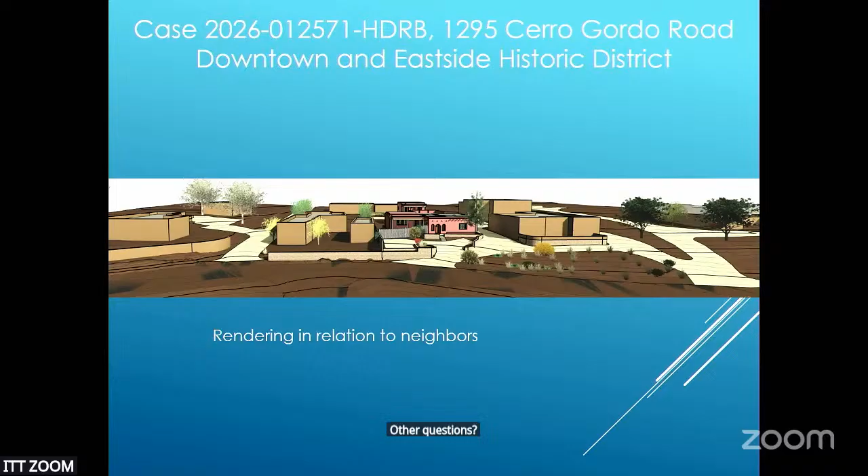Member Benjamin: Thank you, Madam Chair. So I'm not sure why, but I'm confused about exactly what's happening with the retaining walls. I see some 3D renderings. Can you just walk me through that again?

The retaining walls, I think we focused on when we were statusing them as being contributing and an important feature of the streetscape. And it's not 100% clear to me exactly what is being proposed to happen to them. It might be easiest to look at a photograph of the existing walls and tell me what you're going to do to them. Do I have the photo?

So the top photo here is the existing retaining wall. The stairs and everything to the right are going to be removed in order to create a driveway that goes up directly to this property rather than going through the neighbor's lot.

Okay, so I actually found a photograph. On page 1351 of the packet, it's a submission from the applicant. I'm pulling up the packet for you really quickly. And you said it was 13, Member Benjamin? Yeah, 1351.

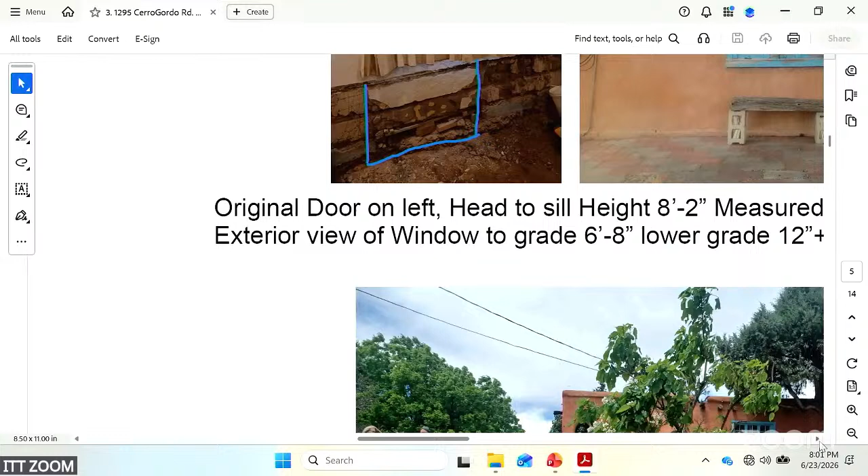Okay, so how much, so they're removing how many feet of wall? It's 12 feet. And how many feet of wall did we designate as contributing? The entire yard wall. How many feet is that? I don't know the full length. Well, what percentage of the contributing wall is being removed, would you say? I just don't know. I can't tell from the picture how much more wall there is.

I think we should ask Harvey that question. Okay, so basically, is it going to be reconstructed with the rock that's being removed? The rock is going to go to the right for the yard wall there.

The reason for creating this as a driveway entry is right now the driveway entry is actually on another property, so they're separating their property. This used to all be one property. The neighbor to the right has split the lot, so now they have to use that neighbor's lot to get onto this property from here. So they're looking at a new driveway to access the front of the house.

We do have another entrance to the property at the rear, but that has not been resolved yet because they've withdrawn the garage portion of the submittal.

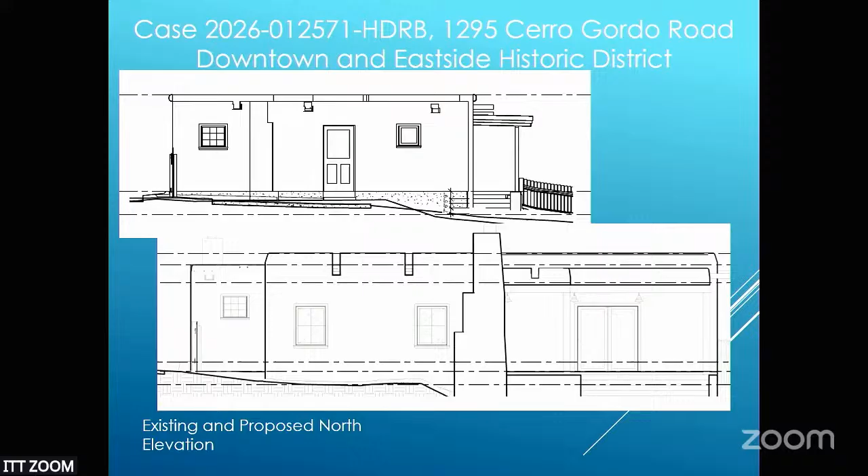Can we see a photo of the proposed, the elevation of the proposed, the existing and the proposed? So this is the north elevation of the house. It doesn't have the site portion.

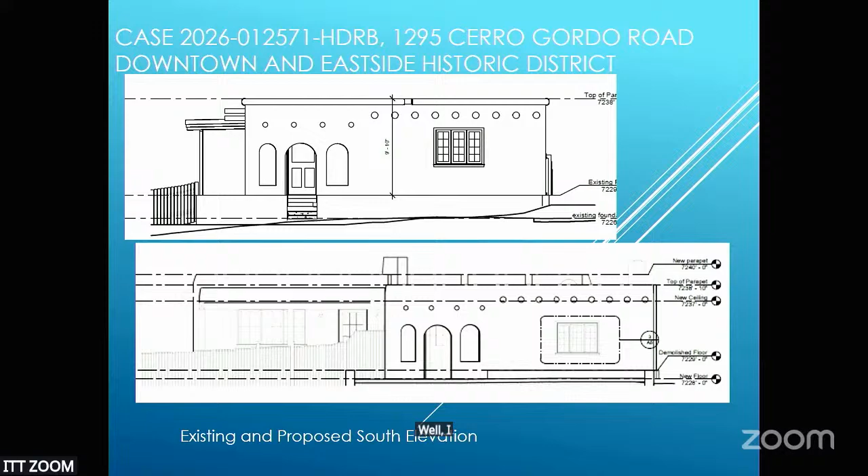Well, I was wanting to see the walls. Okay, that's kind of what I was waiting to hear. Thanks.

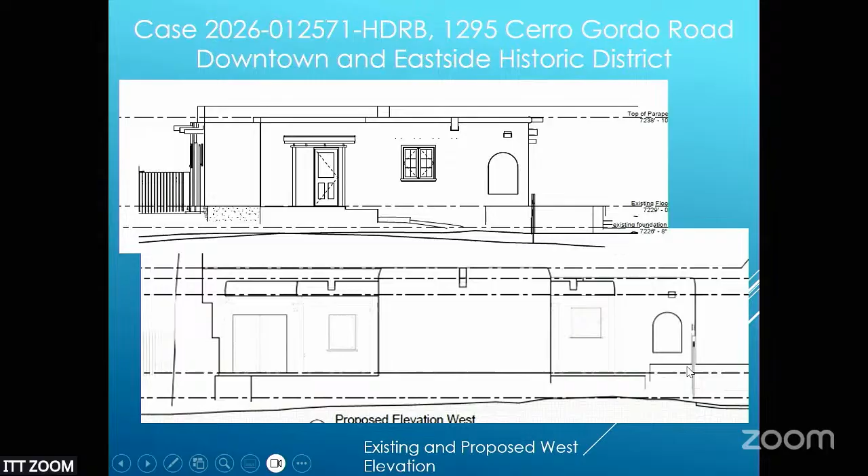And then the wall to the right, what is the height? That steps down, so it starts at about 3 feet and then steps down.

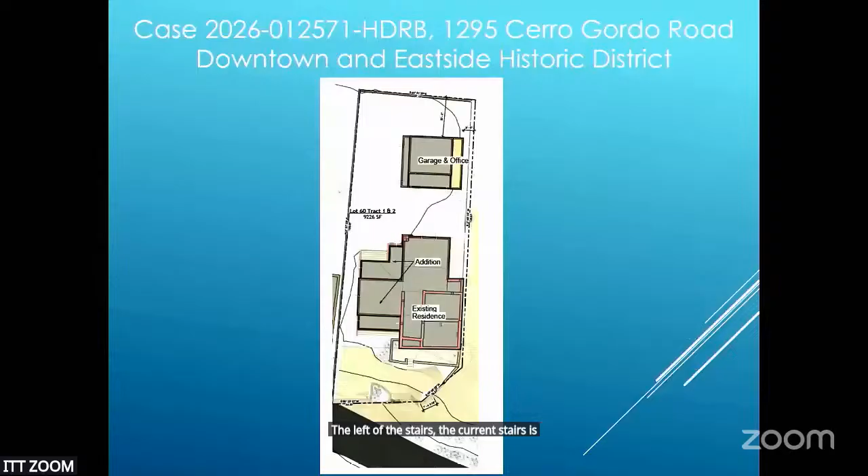I'm looking at the site plan, the existing and the proposed, and I see a different shape in the planter to the left of the stairs, the current stairs. Are you planning to alter the contributing planters in the retaining wall?

The planter would be modified to allow for the turning radius of a vehicle to get up the hill. Right now it would impinge on the turning radius of a car or truck going up there. It would be replaced with the same material and in better shape than it is currently.

So, and can you tell us where's the current parking at this house? Is it not in front? It's in front of the house.

And could you clarify which road or which access is the neighbor's? It appears the driveway continues to be in the same place it is now. Yeah, because that accesses the neighbors. Actually, there's multiple neighbors that have access to that driveway, but the immediate neighbor we have been in contact with is the one in the adjoining house to the right, which can be seen on the site plan.

And is that the same proposed access for the new garage? No, there is another easement to the rear of the adjoining house to the west. It's basically their driveway.

They're again not a suitable delivery route for larger vehicles. It's just a driveway width and it's not marked. So since the address is on Cerro Gordo, that's where people are going to access the property.

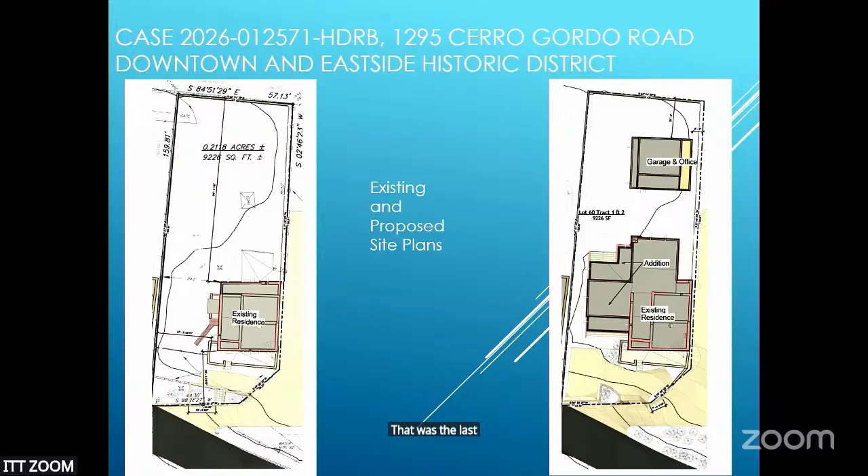Matters for the board. Yes, Madam Chair. Sure, I'd just like to say thanks, Gary.

It's been a pleasure having you in this setting, and also for the past 19 years that I've worked in the historic district as the director and as the inspector. Really a pleasure to work with you.

I'd just like to say, it's bittersweet, and it's been a long run, and it was my pleasure to work with you as well. It's a decision that was made a long time ago. Something that came in last year was a letter that Harold sent to me, and that's when everything started, whether I wanted to do this or not. But it was a pleasure working with you all, and I will miss all of you.